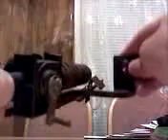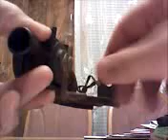Alright, what happens is it attaches right here to the firewall and is roughly horizontal when it's installed in the engine. Now, you'll see here it's loose. This is the arm that connects to your temperature control valve. Rather, it's connected to a cable that when you adjust your hot or cold temperature, this arm moves accordingly, and opens or closes this valve here. As you can see, it's closed, which is my problem.

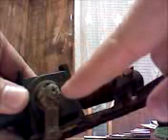I didn't have heat. Now initially, I checked this screw to make sure that it was tightened to its proper torque, but as I was looking at it, I saw that it had this sideways, lateral, and vertical play. That was a bad sign. So, after removing this screw, I took a look at the arm.

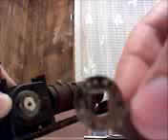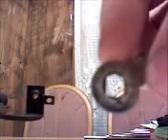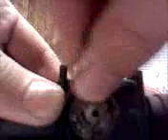And if you look at the arm here, it's got a unique shape to it. It looks sort of like a house, right? A somewhat square with a little roof there. See it? And then I look here on the actual valve, and I noticed that there was nothing for the cutout to grab onto. That when I placed it against where it was seated, it didn't move the valve inside there.

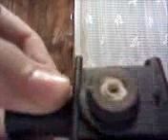And if I look at it horizontally, I can see that there's some protrusion here, but it has visible evidence that it broke off. So that was the reason why I needed a new valve. And to illustrate this a little more clearly, I drew a diagram here.

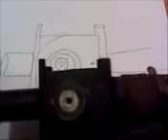Now if we look at this from this point of view, there's my rendition of the heater control valve, as you can see here. Now, when the heater control valve is closed, i.e. you have the temperature set for cold, we should have the house pointing down. Okay, this little tab should be oriented such that the house is pointed down and the arm is approximately this angle in relation to the heater control valve.

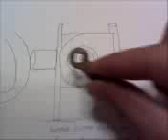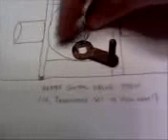And it swings something like this to adjust the valve. Now, conversely, if we're talking about heat, then the house is going to be pointed with the roof to the left. So here's what it looked like if it was fully cold, and when the house is moved fully warm in approximately that position, then we see that the house is pointed left. And again, this is what it'll look like when the heater control is set to its fully heat temperature.